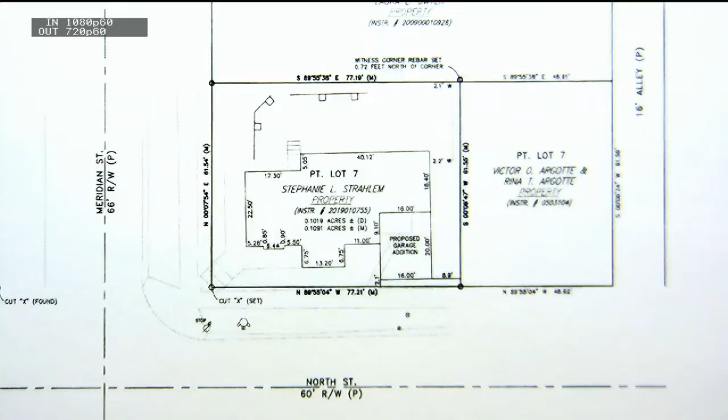2/3 of what would be an original lot. So we looked at it with Ms. Strahlem to see if there was a way we might be able to fit some sort of garage on here attached to the house to give her some off-street parking in a covered space. And we're able to fit what essentially is an oversized one-car garage, as you can see in the corner of the house right here. This is in the central business district, so they have 0 front setbacks off of the streets. So she could be as close as possible to that property line. It does meet the side setback to the east. But there is just not enough room on this property to get a full 2-car garage here. If we did that, you would start encroaching on that adjacent property there.

And as you can even see, you probably can't see it very well, but actually the home that's on that property to the east actually encroaches on this property a little bit, as shown in this survey. So the idea of putting this garage any closer than possible to that side property line just really isn't terribly feasible. Just causes too many issues for the proximity to that property line.

So what she's proposing here is an oversized one-car garage that would be attached to the house in the location shown there. She's intending, and she'll show you here in a second on the overhead, she's got some really fantastic drawings she put together that show you the overall construction of the garage and how she's intending to match the siding of the house so it looks appropriate for that house. And just so you know, this is in a historic preservation district, so she'll have to go through the HPC to get the architecture approved as well. So it will have to be appropriate to the style of the house and design of the house. So that's it in general.

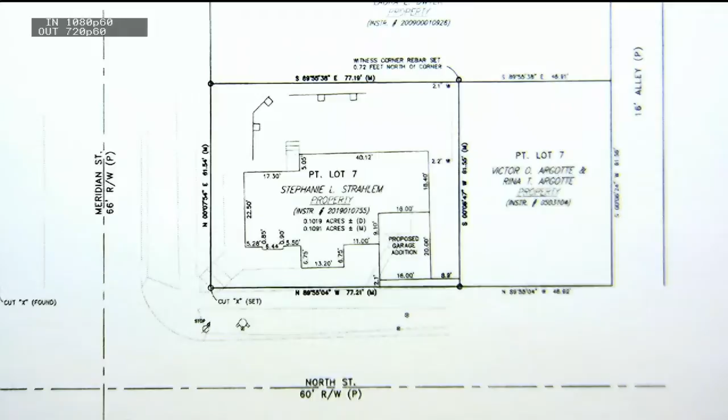In terms of the staff report, I've kind of gone through the basics there. For the record, I do have findings of fact that meet all 3 criteria. And finally, the recommendation: City of Lebanon Planning Staff recommends approval of the Development Standards Variance Request to permit relief from the attached 2-car garage requirement of the Unified Development Ordinance. I'd be happy to answer any questions.

Got 2. What is the dimension from the garage to the property line? I couldn't read it. Is it the south property line or the east property line? The east property line. I think it's about 8, a little over 8 feet.

Is there any setback or anything from North Street to the front of the garage or anything?

So this is zoned central business. Central business has a 0 front yard setback adjacent to any street. So theoretically, she's 2.1 feet off of that property line. She could be 0 off of that front and still meet the appropriate setback for the central business district. So she does meet the required setbacks on the front because there is a 0 setback there.

So is that the back of the sidewalk then? Is that what you're going off of, roughly, here? It's probably not exactly the back of the sidewalk, but it's close to it. Because it looked like, as I drove by there, it looked like a very narrow sidewalk. Yeah, it's 2 or 3 feet, maybe a 4 or 5 foot sidewalk. Okay.

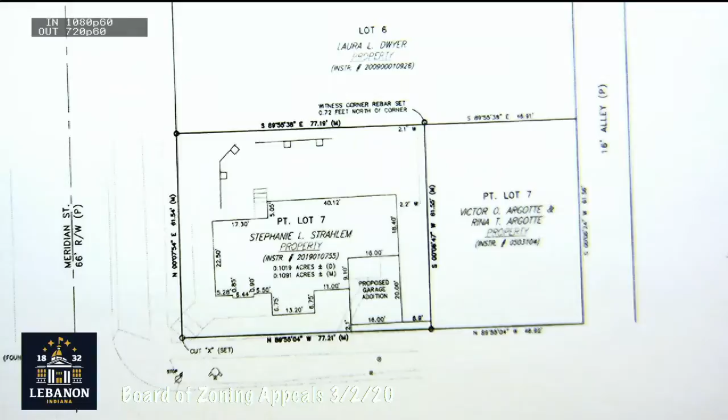Thank you. Any other questions?

Thank you. Okay, now we'll hear from the applicant if she cares to step forward and give us a little information. I don't know what I'm doing up here, Ben, with this projector.

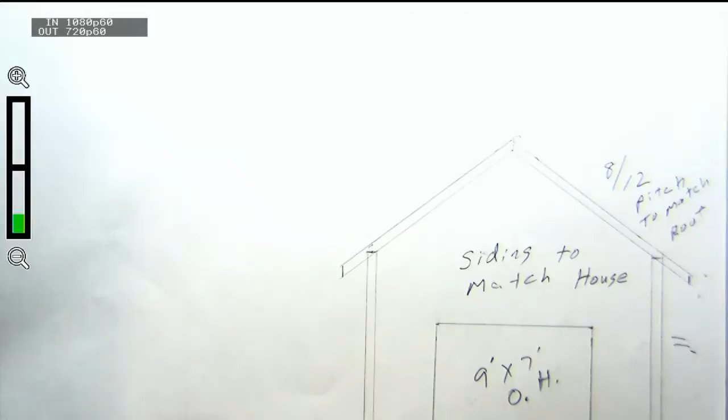So if you've driven by there during the day, you know there's not really great parking. It's very difficult to get a spot by my own house. So right now, there's just some concrete kind of stoop there that really needs to be torn down in general. It's in bad condition, and I wanted to use that area to try to make this garage, which will be 17 by 20, so.

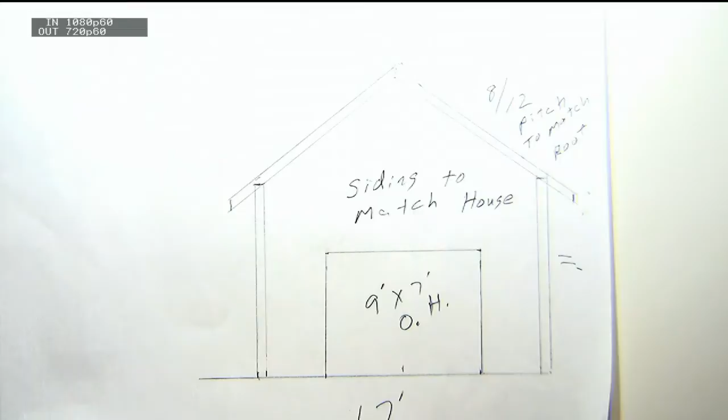Okay, are you going to tie the roof into the garage to the house? Yes. Okay, thank you. Any other questions? Thank you.

Fernando? Okay, it is a public meeting. Does anybody care to step forward and speak anything about it? Seeing nobody's going to step forward, we'll close the public end of the meeting.

Ben, you got anything further to say? Okay, since there's no questions, I'll entertain a motion. Make a motion to approve 20-09 with, there's nothing written elsewhere that I see, so as is.

Second. Second. Okay, I have a motion and a second. Did you take roll, Kelly? Bruce Polly, Aye. Chad Kiger, Aye. Ron Edwards, Aye. Lori Gross, Aye.

Congratulations. Good luck.

Our last item on the docket, 20-10, is the property located at 224, 309, and 310 South Lebanon Street. The property is zoned central business, is within the downtown overlay district, and comprised of 1.83 acres.

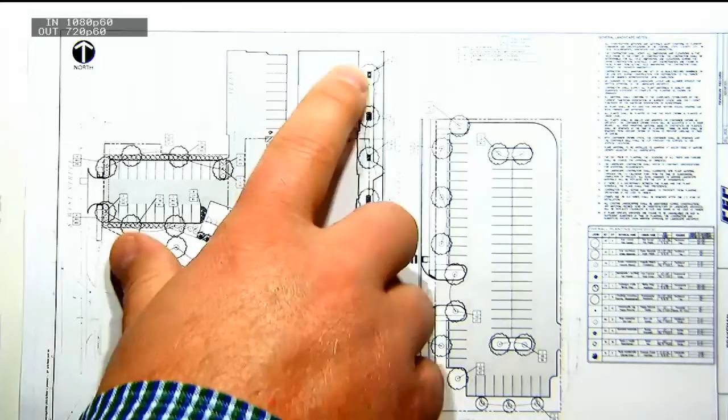And then just at the far north end of this is New Life, the 2 buildings that New Life used to own that are now owned by the applicant. So they would be tearing down the Estes building on the east side of the road and the 2 buildings owned by New Life on the west side of the road. This will physically attach to the buildings that will be remaining to the north here.

So it is recreating that streetscape a little bit. The buildings do sit a little bit further back off the road than they did previously to create a wider sidewalk area, maybe some outdoor seating and that sorts of things. So just to walk through this in general, this is a 4-story mixed-use building.

The first floor would include retail and restaurant space for lease, and then the upper 3 floors will be market-rate apartments of various sizes, starting with some smaller studio apartments, then primarily 1-bedrooms and some 2-bedroom apartments on 3 floors.

They have parking both to the rear on the west side of the road, with a connection to West Street, and also a parking lot on the east side of the road.

The overall proposal for this site is that this would be a Phase 1 building on the west side of the road, and they're providing a parking lot on the east side of the road to provide its parking requirements.

The long-term intention, and I don't have a definition for long-term yet, is that this would be a temporary parking lot that would ultimately be replaced by a Phase 2 building that mirrors what's on the west side of the road. That can't happen until we have a longer-term parking solution for downtown.

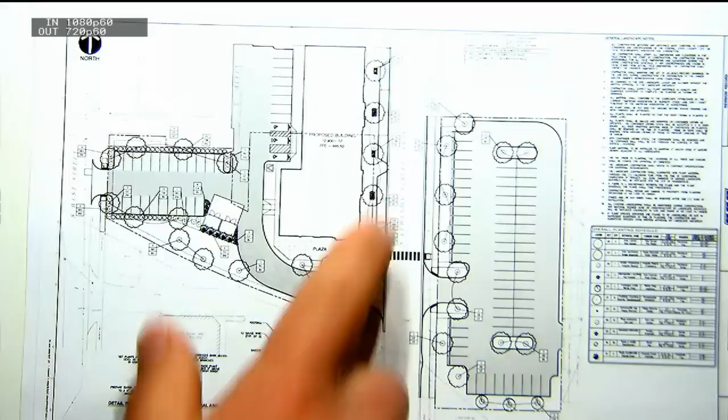It would drain in that swale to the southwest corner, where it would go into a beehive, close to the storm sewer towards the south end of this parking lot.

So it's a much more cost-efficient solution for a short-term parking lot to sheet drain into that swale, as opposed to putting infrastructure under the entire parking lot to bring it down to that storm sewer. So that relates to the temporary nature of the parking lot.

So I'll just walk through some of the other overall design elements related to the variances. The first one is a parking setback.

They're asking to vary from both the 10-foot front setback and the 5-foot side setback requirement, in a few different locations. On West Street, they're proposing a 5-foot setback rather than the 10-foot setback. They could meet it, but it would reduce the number of parking spaces, and we felt it was more important to have a couple more parking spaces than to go from 5 to 10 feet.

They're still providing landscaping around the perimeter of the parking lot to dress it up. If you go out there right now, you won't see much of anything other than gravel and pavement, so this is an improved condition over what we see now.

So that is one of the setback variances, and you'll also see it along the north and east sides of this parking lot here on the east side of the road.

Again, when you start looking at trying to provide an appropriate setback off the front, then you've got the 20-foot parking spaces and the drive aisles. When you get to that point, you're only leaving 2 or 3 feet on this east property line.

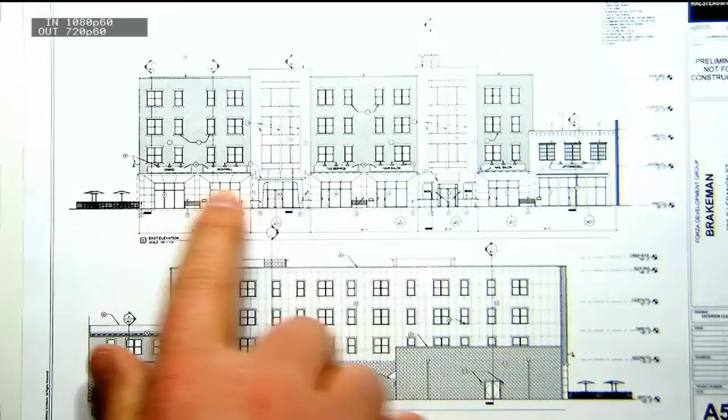Just to walk through the materials, this is brick. Then you've got a material that would kind of match a stone - it's not a natural stone material, but a manufactured stone material that would be across those fronts. And then you've got two different colors of brick that would be on those upper floors. In the back here, they're using masonry block on the lower levels, and EIFS panels on the upper floors, and that is what would face west.

On the south side, you would see it mimic that stone and masonry as well. So they have provided a very nice elevation that was approved by the HPC. Again, we're just really looking at providing some interest on that height, and giving them a couple extra feet did that in terms of creating some sort of issue with the downtown for those extra 2 to 3 feet - we really didn't feel there was any sort of issue with that.

And then the final one would be the minimum living area per dwelling unit. The requirement is that the minimum living area for multifamily use would be 600 square feet. When the applicant was looking at the market and the appropriate mix of units for this building, they felt - and they'll walk through this in more specifics here in a little bit - that there was demand both for smaller studio and one-bedroom apartments up to some larger two-bedroom apartments.

So their mix is upper 300 square feet - I think it's about 380 square feet for the studio apartments - ranging up to much larger than that for the two-bedroom apartments.

I think they have a couple of floor plans for the one-bedrooms that are just right under 600 square feet, but I'd say probably 75% of the floor plans are over 600 square feet. Their entry-level smaller apartments are slightly smaller than that, down closer to 400, where they're seeing the market for those studios and one-bedrooms.

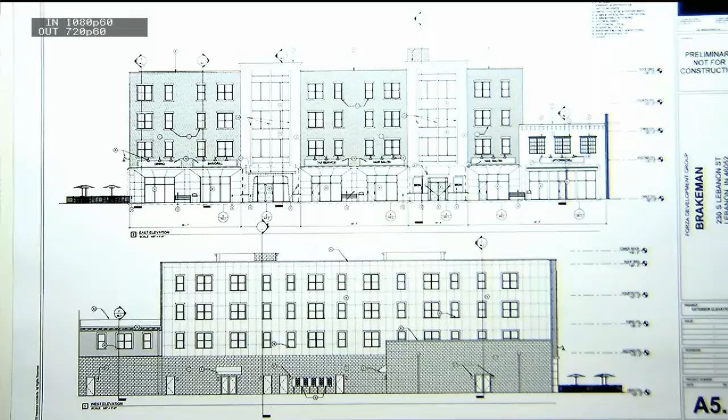In terms of the findings of fact, I won't take the next 20 minutes to read them all, but for the record they're available in the staff report for each of those 6 variances. Staff has recommended approval of each of the 6 variances. On the parking lot landscaping requirement, we placed a condition that they meet all applicable parking lot perimeter landscaping requirements on the west side parking lot, which they have already done. So we've recommended approval of those 6 variance requests.

I have a question. On the entrance and exit into the plaza and to the rentals, we just have one crosswalk, and you've got another door to the north, looks like to me.

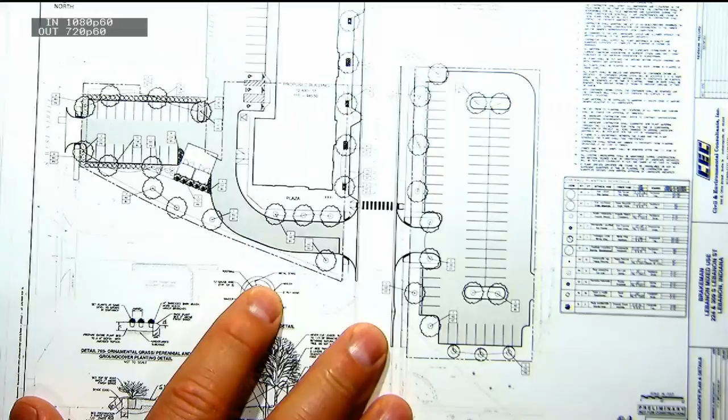So you want to see the site plan or the elevation? What would be most helpful? Up here, up at the top. So there's one crosswalk over to the east side - yeah, we're showing one designated crosswalk. Then there's another, looks like an entrance to the north.

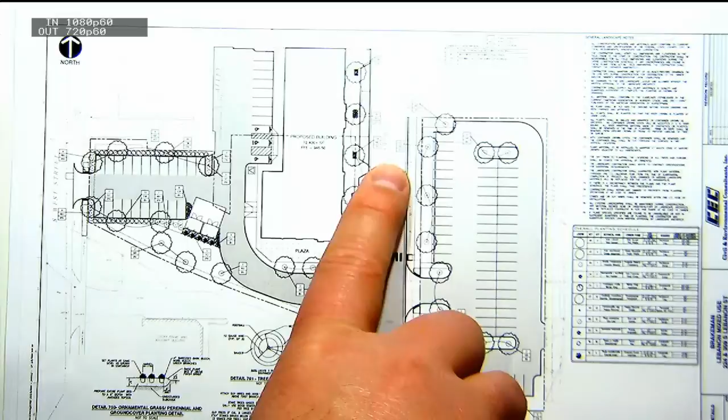Second facade - are you speaking of this little bump out here? So what they've done is they're also proposing some parallel parking spaces on Lebanon Street. So that's more just a bump out to provide ways for cars to get in and out. This would be the only designated crosswalk down here at the south end of the building.

So will that be the only entrance to the rentals? The upper floors will have their own entrance - I've got a floor plan I can show you if you want to see how it lays out. One of these entrances on the front of the building is an entrance to a lobby area that would have elevators to go to the upper floors. The rest of the entrances you see on the building - but it is near the crosswalk, it is north of the crosswalk.

I have a couple questions - I need to go back to that drawing. You want the elevation? No, just the site plan. Yeah, site plan.

Over on the Estes property - am I seeing an entrance or exit from the parking lot into, I guess, a back alley? Is that what that is? Yes, and I think that's essentially in the same location where you can get into the alley now. Is that alley paved, or will it be paved? It is paved - I wouldn't say it's paved well, it probably needs to be repaved, but it is paved now.

Okay, next question - let's go to the other side of the street, that other parking area next to the dumpster enclosure. Is all of that grass area, the square footage of that, meeting the requirement? I mean, is that excessive for that? Here's my question.

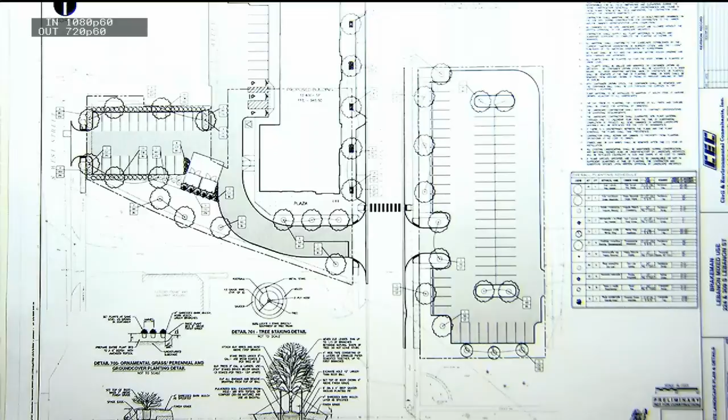Okay, how about on the commercial side? It actually depends on the use. So what we did here is we took a general parking requirement of basically 4 per 1,000, and then applied that here. So if it's a restaurant, it's based on the number of seats, 1 space for every 4 seats plus 1 space for every employee on the largest shift. So we can't calculate that right now, so we used a more general 4 per 1,000 requirement, which is a fairly typical standard to use on general commercial space. And then because it's a mixed-use building, you have a shared parking calculation.

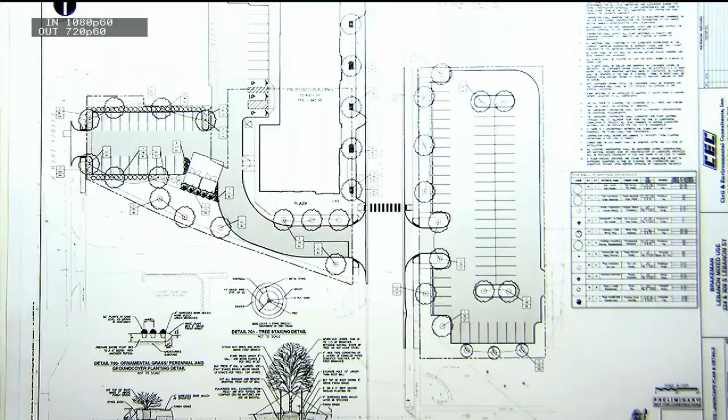If you really want to get into it, there's a huge, long spreadsheet that I had to fill out. There's a shared parking calculation because what happens is during certain times when the residential uses need more parking spaces, some of the retail needs less. So you go through that, and then whatever the largest number is, depending on the time of the day, that's what you use for the parking requirement. Well, then again, it depends on the retail too, right? Correct, could be something that's more popular at night versus during the day.

I think their intention is that corner space on the south end, they've designed it for a nice restaurant, whether it's a sit-down restaurant or a microbrewery, on the south end of the building where it would be most visible as you're coming up Lebanon Street. And they've got a nice patio area to the south where they could have outdoor seating and stuff like that too.

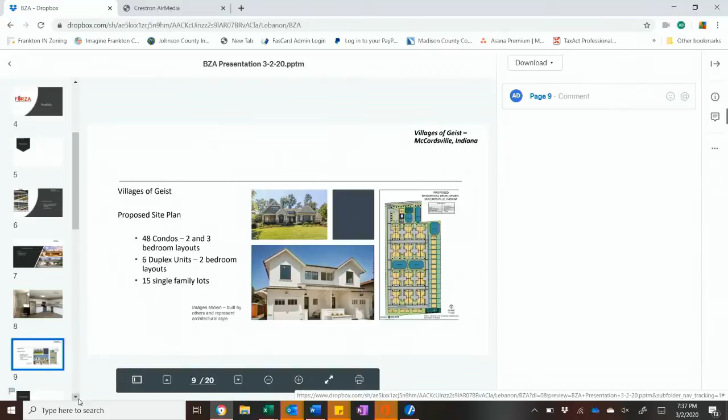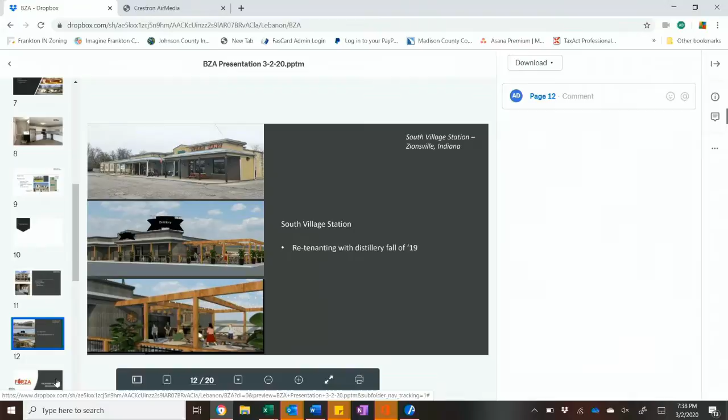Now for our feature presentation. As I said, we're very excited about coming alongside and, in our small way, providing something hopefully complementary to your guys' already authentic downtown scene and environment here.

This particular site is historic for a couple different reasons, as Abraham Lincoln came through this particular area on two different occasions. So we want to pay some homage to him, and we're working diligently to come up with hopefully some kind of concept. We'd like to do some form of something to dedicate, in addition to the memorial that's there for Abraham Lincoln, whether it's a mural or something on the side of the building that is a bit of an homage to him and also to the town of Lebanon.

This is in the TIF district, and it's in an opportunity zone, which provides some enhancements both for our operating businesses that would occupy the lower levels as well as the investors in our particular projects. As we mentioned before, 41 residential units would be on floors 2 through 4, and we'll go through the studio and one-bedroom sizes and square footages momentarily.

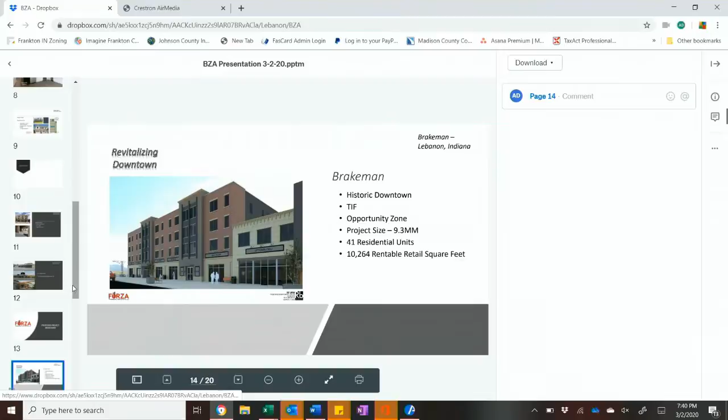As Ben mentioned earlier, we talked a little bit about the variance applied here for the unit sizes and unit mix. We actually recently received our market study back, our third-party market study from Valbridge Appraisal Services here in Indianapolis. It indicated that our projected unit sizes for studios, ranging from 354 to 383, and one bedrooms, from 512 to 642, was directly in line with not just comparisons here in the market, but also sizes and comparisons throughout the greater Indianapolis area.

So we have a total of 9 one-bedroom units that will be less than 600 square feet, but as we talked about earlier, 75% of those one-bedrooms and/or two-bedrooms would be greater than 600 square feet, going all the way up to nearly 800 square feet for a two bedroom. The studio, of which we only have 6 units proposed for this particular project, ranges from 354 to 383 square feet, in line again with market comparisons from the Flats at Slate Run and a few other notable projects listed here on this slide.

As we talked about earlier, one of the variances we're applying for is building height, so you do see some variation at 2 to 3 feet, as Ben articulated earlier. This is primarily to really accentuate various parts of the building and various entry points to the lobby for the rental units, but also for our anchor retail tenant on that end, where the crosswalk will meet right in that area. We're doing this to give it a bit more of an aesthetically pleasing look, but also a more defined entrance or entrance points to the building and structure, helping give a bit of a break to the building too.

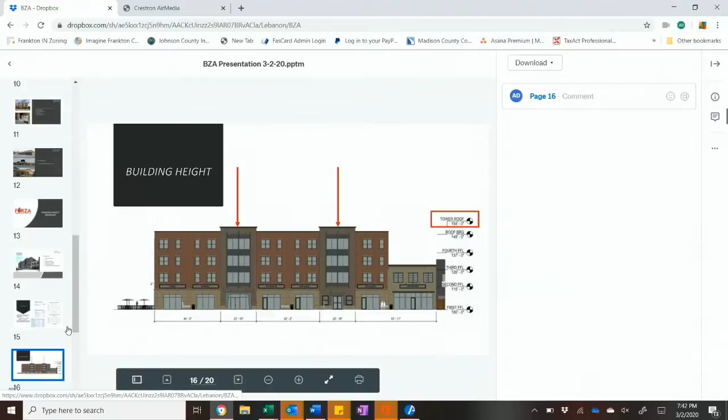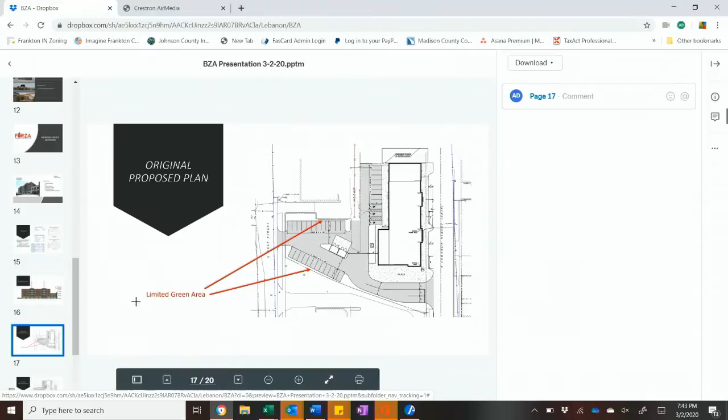So there was some variation from the original plan to the new plan, which Ben showed earlier and is listed here as well, a little smaller here. Let me zoom in on that. With that diminishing property line in the back, we're trying to maximize the number of parking spots while meeting setback requirements, which makes it very challenging in the back, and still meeting the landscaping buffer requirements.

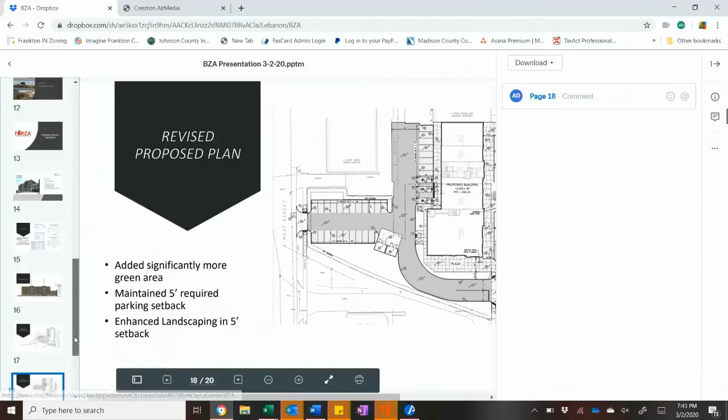Ben had talked about earlier the temporary proposed parking lot across the street. I have a good feeling that once this project stabilizes, we'll be able to come back and discuss a re-envisioned second phase across the street, and maybe a phase 2 or phase 3 to continue to build out the core and enhance the existing downtown core.

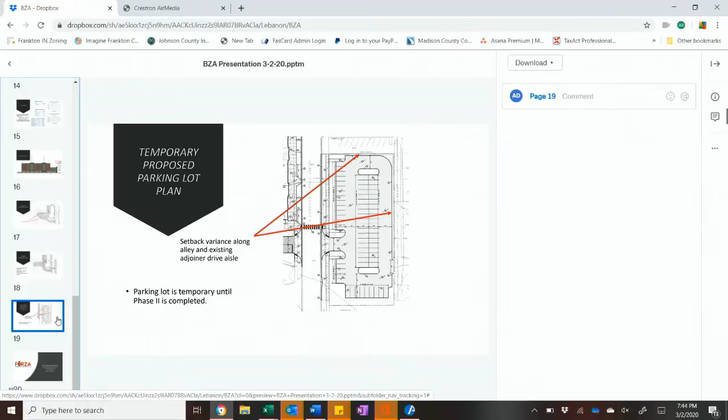So that concludes what I had. I think I was probably about five minutes longer than I should have been, so I hope everybody's still awake. Is there any questions or anything I can answer?

Questions from anybody? I think I'm good. Okay. We also have our engineer here, Aaron, who will answer any technical questions in addition to Ben if you have other questions. So, thank you.

Does this go clear to the alley now, in the back? No, on the north. No, it doesn't, it stops at the liquor store, correct? The tavern?

So, if you look at the north end, this building will attach to Club 39, and then the alley runs back behind the parking area back here. So yes, it is physically attached to Club 39.

Okay, so we've worked very diligently with our engineer and structural engineers as we go through the construction phase and process to make sure that it's structurally reinforced, that adjoining wall, as we want to make sure that it's a quality finish, but also from a technical standpoint, a building standpoint, that it meets code and is structurally reinforced the right way.

Thank you. Any other questions? No, I think that's it for right now. All right, thank you.

I was just reviewing these again today, so bear with me. Oh, I think I breezed right by it.

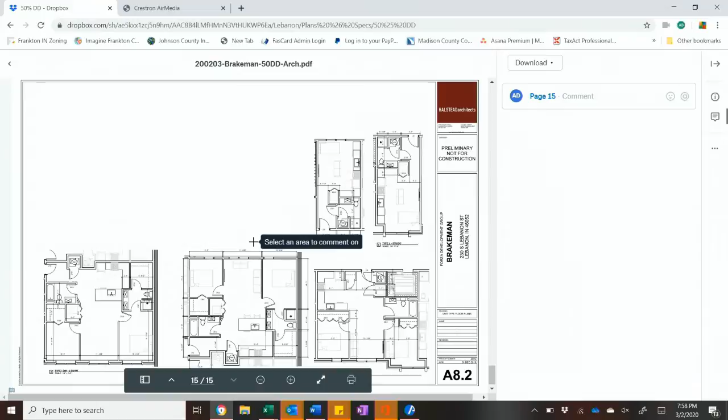Okay, I'm going to do my best to zoom in on this. Okay, is that a little better? I guess, can everybody see that? You want me to zoom in one more time? No, that's good. Is that good? Okay.

It's interesting, Mr. Pauly, I would agree with you that it's interesting that the market and the demand asks for this, but what I may choose, or some folks may choose, may not necessarily be fitting for a certain type of individual, whether it be a professional and/or somebody that works here in the park, or a commuter back and forth from Lafayette and/or to Indianapolis. It seems like the millennial generation seems to be very drawn to this particular unit size from when we went through our market study, but also when you just look in general at demographic information for apartments, not just in Indiana or greater Indianapolis area, but throughout the country. This seems to be what everybody's gravitating towards - a smaller footprint and a higher quality of finish. It's a little less to take care of, but also conducive for what their needs are.

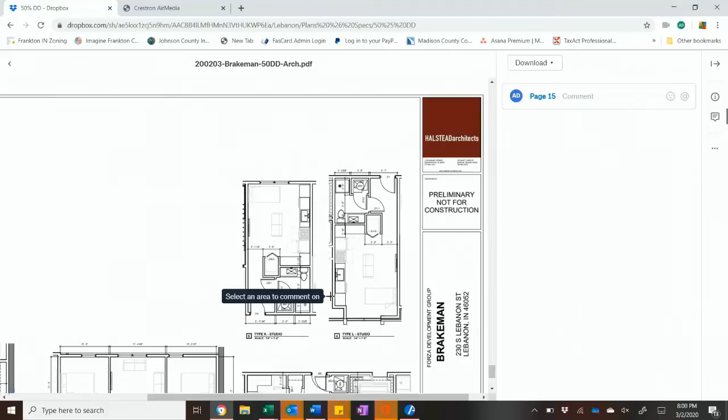What's the total breakout of unit sizes that you have? The unit mix, yeah. I should have wrote that. One moment. Yeah, 41 total, correct? 41 total, and 75% of them are greater than 600 square feet. I do know that, but let me get the exact mix.

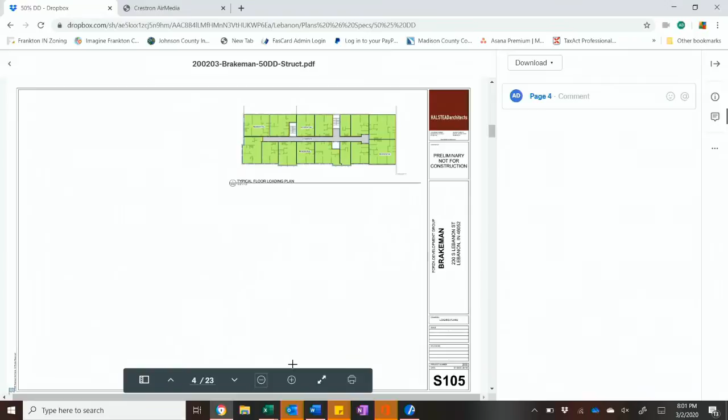I'll try to get our unit schedule. Go ahead.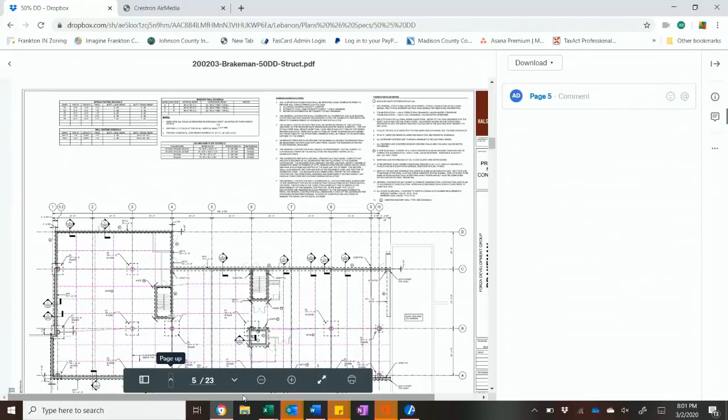I think you answered my question, which was really how many of the total units fall below the 600 square foot mark. So two of them are at 354 square feet, correct. What's the next break above the 354? The remaining four are 383 square feet for the studios, and those would be the smallest units available in the project.

Primarily, when you look at the demand for market rate rentals within the market study completed by the town and recently by Valbridge Appraisal Services by our organization, we wanted to maximize the greatest number of units we could get into the building to accommodate that demand, as your market will absorb greater than 80 market rate rental units each year, and we're only meeting about half that with this particular project.

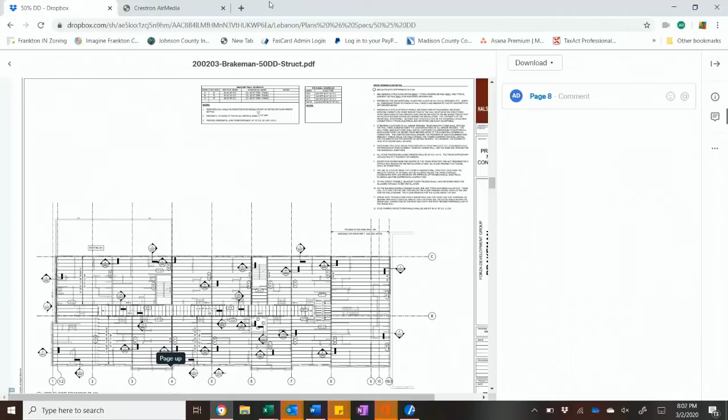Let's continue to look for the unit mix. Is there any other questions? Because I know we just changed this - what happens after 5 years when you build Phase 2 on top of the temporary parking?

Ultimately, your parking needs double. So that's where I got into - the city would partner with them to look for a longer-term solution that addresses all of the parking needs essentially south of the square. I would guess, if we're looking 5 years out, that solution is structured parking in some way, shape, or form that would accommodate their parking needs for both Phase 1 and Phase 2 and any other potential reuse or redevelopment happening on the south side of town.

So we would have to look for some sort of adjacent site that would accommodate structured parking at that time. If someone was to come in tomorrow and want the parking area to build a larger whatever, what would it do to his parking?

Well, our agreement says we can't allow somebody to redevelop unless we've provided an alternative parking solution. And they essentially have first right of refusal, so if we have somebody else come and approach, we'll go to them and say, hey, you guys interested? And if they say no, we can move on. But we do have to accommodate their parking with some other solution before that could happen.